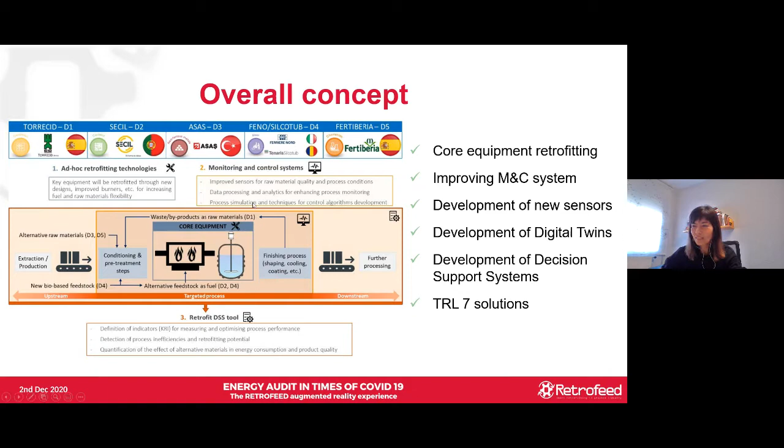Okay, I'm going to go through the technical actions to be implemented in each end user. In TORRECID, which is a producer of frits and glazes for the ceramic and glass sector, the core equipment corresponds to a frit furnace, where one of the main concerns is to reduce the raw material losses between load changes. To tackle this inefficiency, a smart combustion control will be developed, adjusting the combustion conditions to the frit heat requirements. In addition, the feeding system will be enhanced, and together with dedicated sensors will be integrated in the monitoring and control system in order to optimize the energy resources.

A redesign of the heat recovery system of the flue gases will be tested for 2 different purposes. One of them is improving the combustion air preheating process, and the second one is extending the use of the hot air to the frit drying. With these actions, it is expected to achieve energy and material savings and optimize the fuel and combustion air use. A reduction of the material waste and an improvement of the monitoring and control system is expected. Next, please.

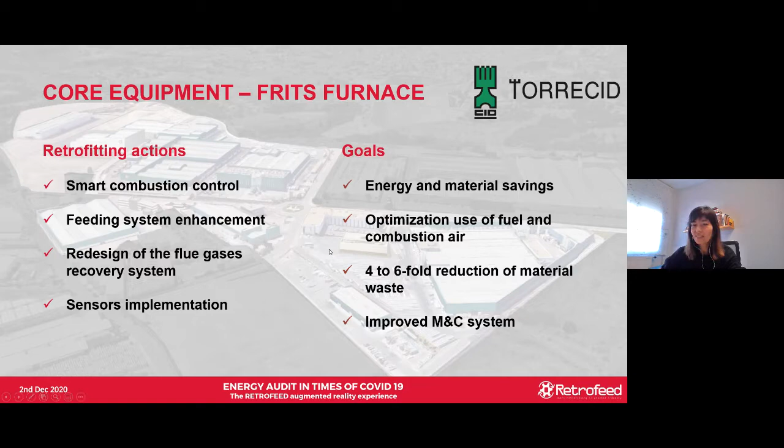In the case of SECIL, one of Portugal's leading cement producers, retrofit actions will be centered in the core equipment, the rotary kiln. A full-scale multi-fuel burner will be designed to be used with alternative fuels. New innovative sensors will be developed and installed to monitor the combustion process based on flame images and characteristics of the clinker composition by means of optical techniques.

In addition, alternative fuel will also be characterized to support kiln performance. Implementation of these actions will lead to a substitution of 60 to 80% of fossil fuel, contributing to a reduction of CO2 emissions. In addition, it's expected a 5% decrease in specific energy consumption, and so an increment in energy efficiency. A flue gases analyzer will improve the monitor and control system.

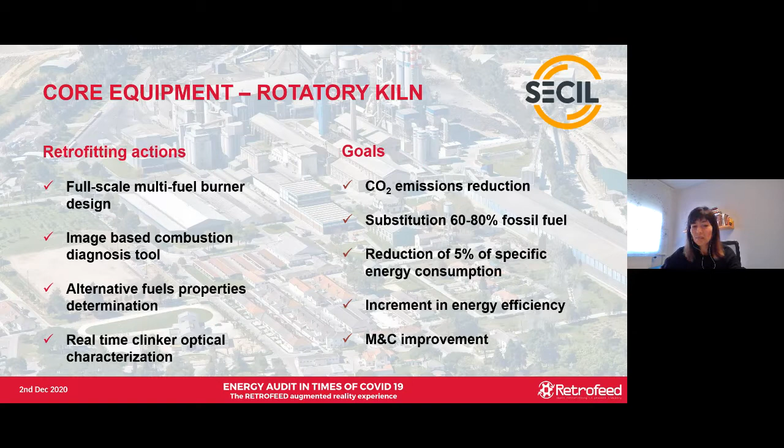In the case of ASAŞ, one of the leaders of aluminium manufacture in Europe, the goal is to increase the amount of scrap in the melting process while maintaining product standards. This way, a reduction of primary aluminium billet use can be achieved. For this, a delacquering system will be installed to remove the coating layer such as paint and oil, allowing an increase in the share of low-quality scrap in the feeder line. In addition, an oxygen injection system and burner head will be designed and installed to improve combustion performance inside the furnace.

Oxygen and total organic carbon analyzers will also be installed to support process management and ensure adequate emission levels, leading to an improved monitor and control system. The expected goals are related to an increment of the share of scrap up to 50%, reducing energy consumption. In addition, this action will generate more efficient combustion and a reduction of greenhouse gas emissions.

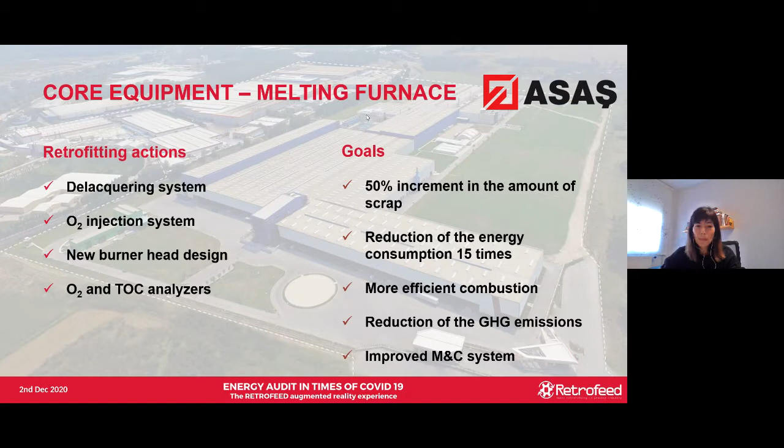In the steel sector, we have two end users, FERRIERE and SILCOTUB. In both cases, activities are centered in the electrical arc furnace, where circular economy concepts will be applied.

In the case of FERRIERE, biochar and plastic grains will substitute the use of fossil fuel for combustion. At the same time, anthracite will be replaced by biochar as carbon source, requiring modification of the injection system and burner. In SILCOTUB, rubber and plastic injection will be used as energy provider in the melting process. In both cases, a reduction of greenhouse gases is expected, and implementation of circular economy concepts will support the reduction of feedstock.

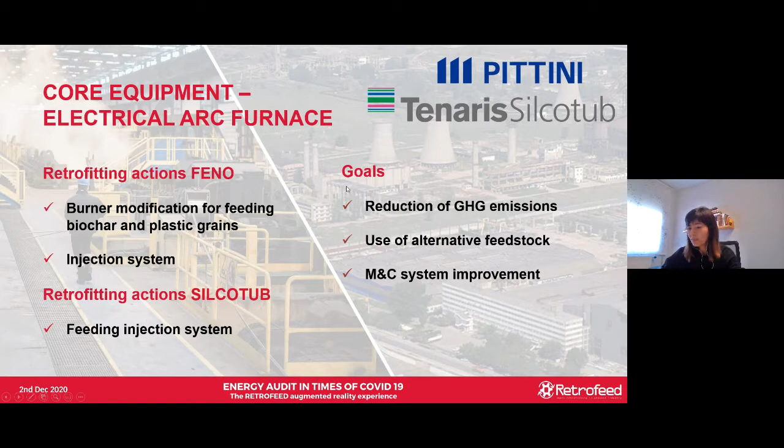FERTIBERIA, a Spanish fertilizer producer and one of the leading international providers of ammonia and its derivatives, will center retrofitting activities in the phosphoric reactor. The idea is to replace imported phosphoric acid by designing a new reactor to incorporate bio-based waste. This modification will lead to a substitution of 10% of the currently used phosphoric source, integrating raw material from waste and reducing cost. New sensors to monitor and control the new system will improve the monitor and control system.

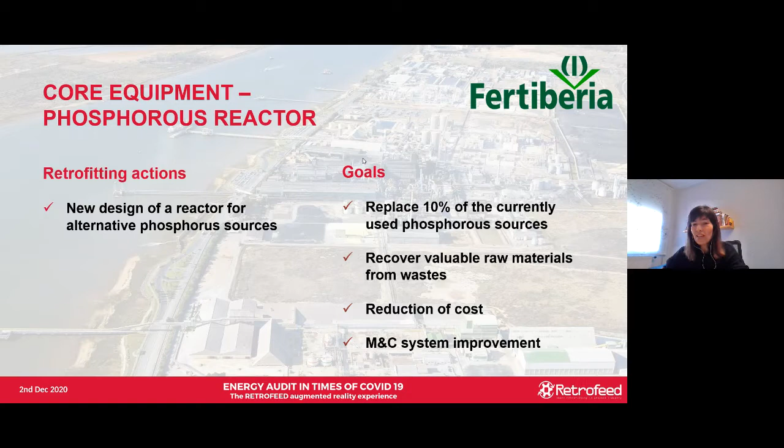With all these actions, we expect to obtain an increase of resource and energy efficiency by 20%, a reduction of greenhouse gas generation by 30%, a reduction of fossil fuel consumption by 20%, operational saving costs by 30%, and a productivity increase of 20%.

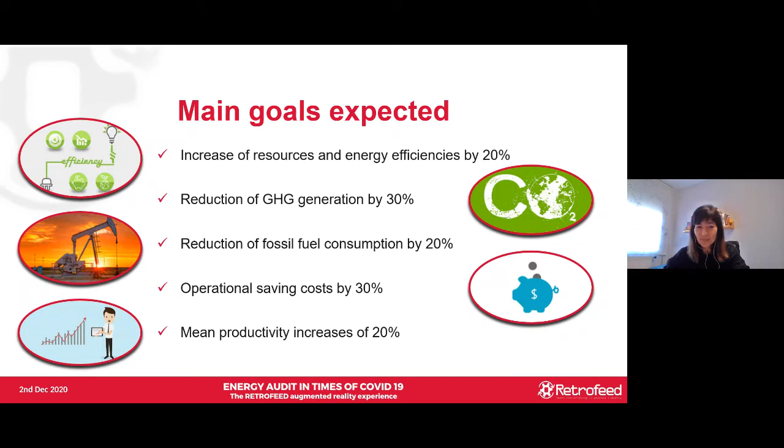As part of one of the first tasks in the project, we found complementarities between the end users and possible synergies that we think are important to highlight. For example, in terms of complementarities, the different sensors developed in CIRCE can be widely applied in other sectors.

In the case of the cement sector, the heat calorific value sensor can potentially be employed in FERRIERE and SILCOTUB to easily accommodate process conditions to the feedstock, whereas the sensor to determine clinker structure could be adapted to the case of the frit produced in TORRECID. The combustion diagnosis tool could also be applied in TORRECID and ASAŞ to determine combustion performance.

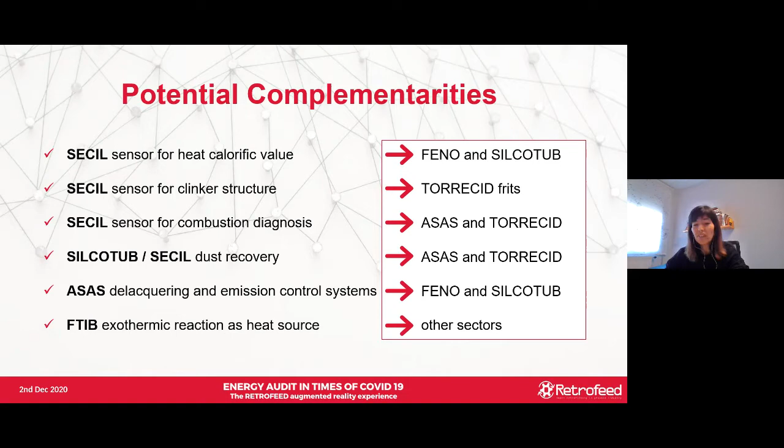The dust recovery opportunity arising in SILCOTUB and SECIL could be valorized for the case of ASAŞ and TORRECID, where metal dust is formed during the smelting process. Delacquering resistance could be an option to apply in FERRIERE and SILCOTUB, although further evaluation is required. Finally, the exothermic reaction expected in fertilizer production can be evaluated as an energy source in other sectors.

The potential synergies that we have already found are as follows: the use of TORRECID wastewater as industrial grade lime, and recovering electrical arc furnace dust which contains zinc, iron, and manganese to be used as plant fertilizer.

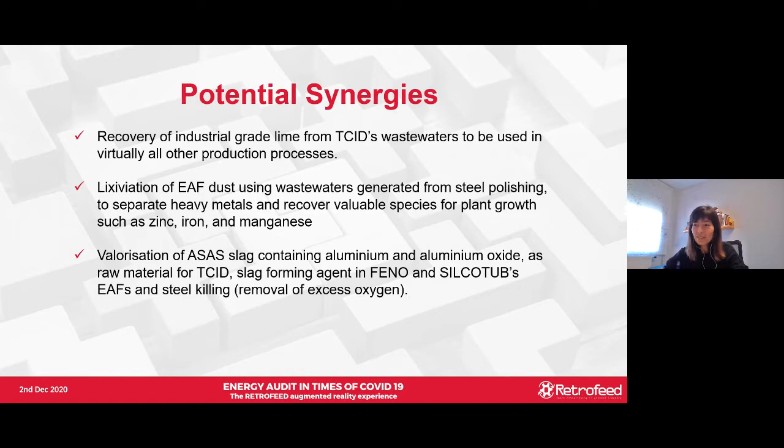The ASAŞ slag contains aluminium and aluminium oxide, which can be used in TORRECID, FERRIERE Nord, and SILCOTUB. The oxide from ASAŞ can also be used in FERTIBERIA for fertilizer production.

The content of different valuable metal materials in waste frit produced by TORRECID can be considered as raw material in the steel sector. Finally, the high content of metal oxide and aluminum produced in the steel sector can serve as feedstock in the ceramic frit process.

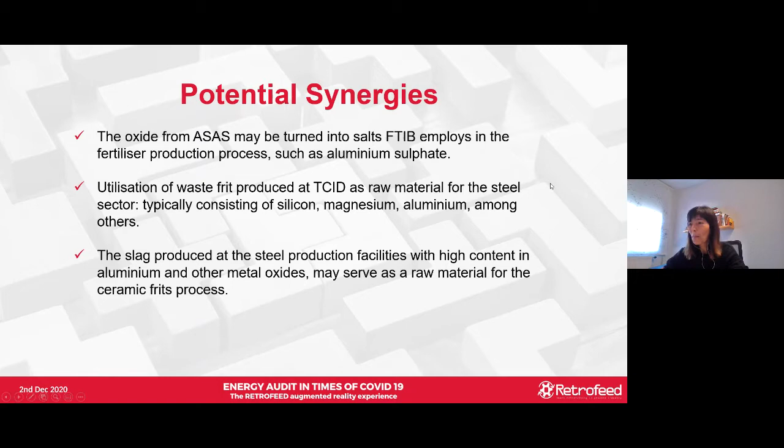So finally, the final remark in this project is that it will make industry more flexible to new producer scenarios. The digital and mechanical revamping actions we will carry out in 5 resource and energy intensive industries focus on core equipment. A decision support system will integrate different models to support the decision-making process.

Synergies and complementarities have been identified to facilitate the transition of European industries to more sustainable and responsible production practices, incorporating bio-based and circular economy concepts.

And that's it for my side.

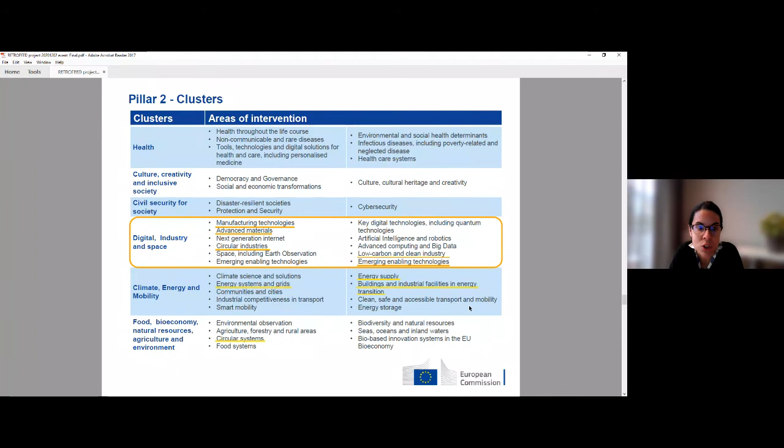There are other areas of intervention interesting also for some of the stakeholders here, in Cluster 5, for example energy systems and grids, energy supply, buildings and industrial facilities in energy transition, or also in Cluster 6 with circular systems.

From H2020, there were some lessons learned that helped to build and strengthen Horizon Europe. The key novelties are the European Innovation Council, R&I missions, extended association possibilities, open science policy, new approach to partnerships, and spreading excellence. I will describe some of them in more detail.

The European Innovation Council will help support innovations with breakthrough and disruptive nature and scale-up potential that are too risky for private investors. This is very important, and it has been identified to bring technology solutions to market. So there will be a Pathfinder for grants from early technology to pre-commercial, and an Accelerator that also includes a blended finance mechanism to bring solutions to market and ensure scale-up.

Another novelty are the R&I missions. R&I missions will be bold and inspirational, with a measurable goal to ensure impact for society and policy making. So far, 5 mission areas have been listed: adaptation to climate change, cancer, soil health and food, climate neutral and smart cities, and healthy oceans, seas, coastal and inland waters.

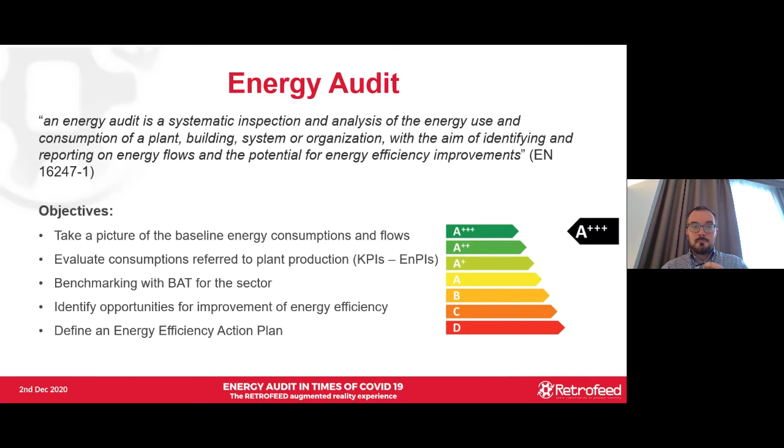In the next slide, we have the energy audit process, as schematized in the European norm. Other European norms provide specific provisions on buildings, industries, and transport, and in addition, every European member state has prepared its own guidelines for the execution of energy audits in line with the prescriptions of the Energy Efficiency Directive. The overview of this chart: the startup meeting, preliminary activities, data collection about the plant and its production and energy consumption, analysis of the data, development of energy balances, evaluation of theoretical and actual energy performance indicators, comparison.

If they are not comparable, since there is margin for improvement in terms of energy efficiency, we identify the energy efficiency actions, carry out a cost-benefit analysis, we rank the proposed opportunities, and produce an energy audit report that summarizes all the analysis carried out, the baseline situation, the proposal for improvement, technical and economical feasibility, and definition of energy efficiency action plan.

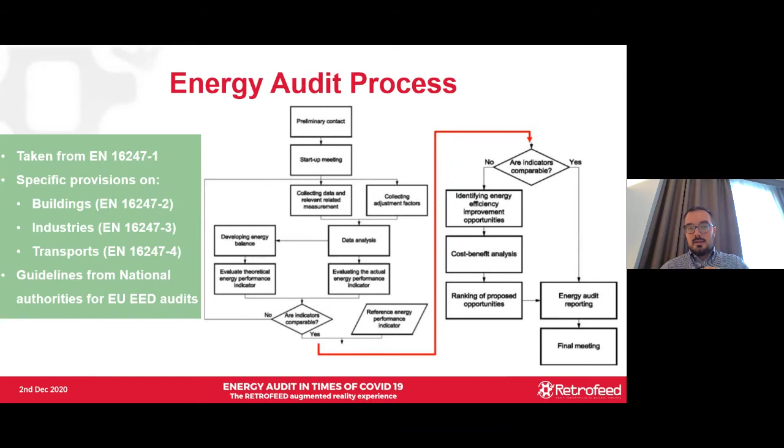So again, the main phases are, besides the preliminary contact and kickoff meeting, data collection, the site visit, that is the core of the analysis, reporting, and final meeting. So this is the core of the activity, and specifically the site visit is the core part. Let's say all the core phases of the energy audit could theoretically be carried out without going to the site. Data collection can be exchanged via email and file sharing, etc.

Energy monitoring tools can be shipped to the site and installed by plant technicians to measure the electricity consumption, other energy consumption, carry out checks with the thermal infrared camera, etc. The only exception was the visual inspection part of the site visit, because we couldn't do a site visit before without going physically to the site, but now with this smart augmented reality solution that we have identified, the Kiber helmet, we have found a solution to complete also the site visit without being physically at the industry.

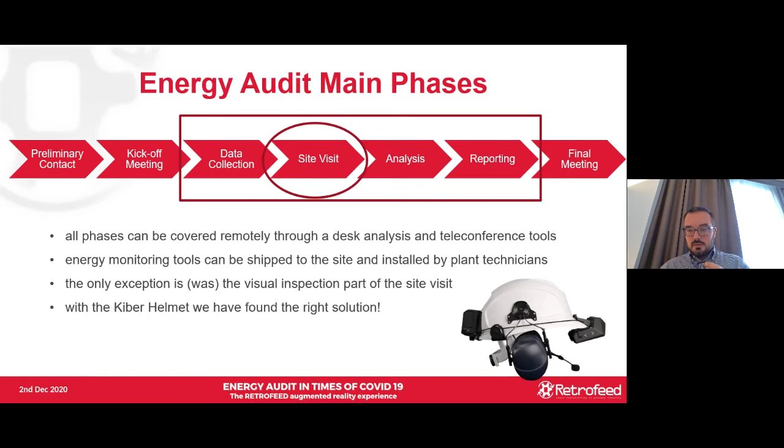Okay, I said that the first phase of an energy audit is data collection. Here, all pictures are very small, but it's just to make you see that we require a lot of data as input to the industry where we carry out an energy audit. And these data are mainly related to general data of the plant, total energy consumption by energy carrier, electricity, natural gas, other fuels, etc. Monitored consumption trends, if they are available thanks to an energy monitoring system, production values to calculate the key performance indicators, list of equipment installed at the plant with electric and thermal power, process flow diagram, site layout, etc.

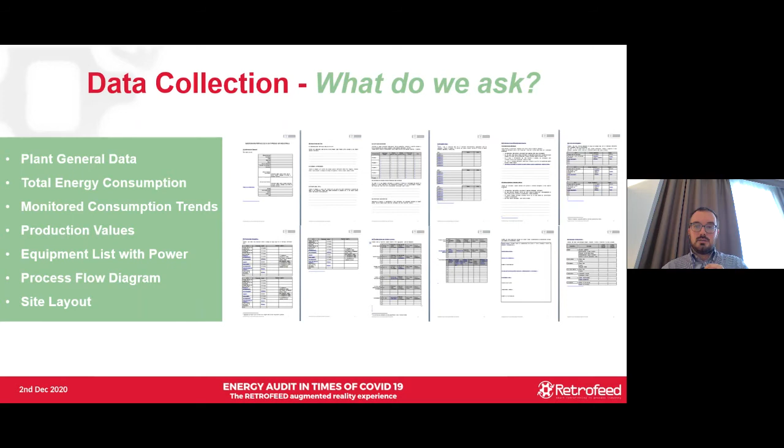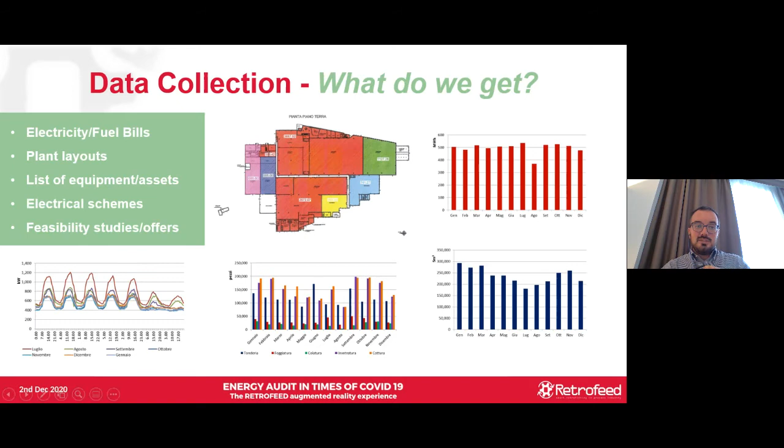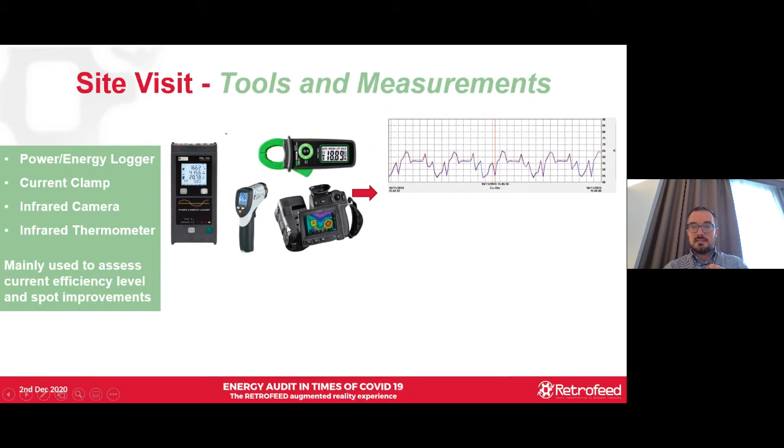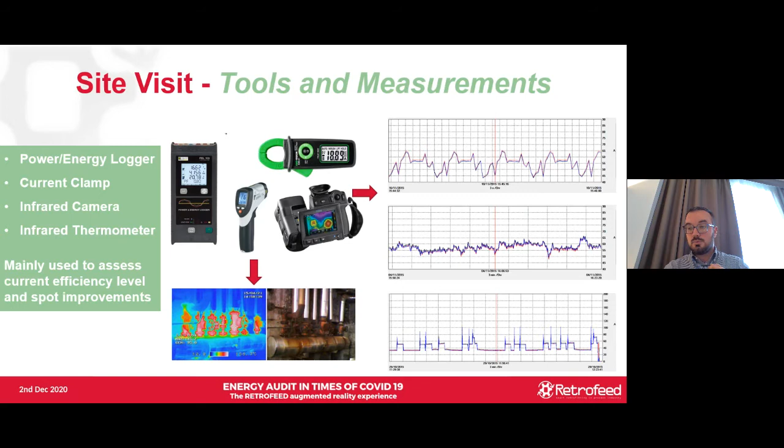We get all this kind of data, and we use this data to assess the current energy efficiency level and spot potential improvement. In addition, what we do during the site visit is a visual inspection of the plant. We discuss with the plant personnel while looking at the different departments, equipment, and areas of the plant. Of course, this could be done also remotely.

While visiting the plant, we try to understand better the real layout of plants and systems, to get the nominal data of installed devices, looking at the labels on the devices if this data were not available from the data collection phase, check the type of equipment, the presence of a control system, check if there is margin for improvement of management practices, and evaluate if there is area for the installation of new devices that we might recommend. All of these are carried out during the site visit together with the plant personnel, so everything is discussed with them in order to achieve the best possible understanding of the site.

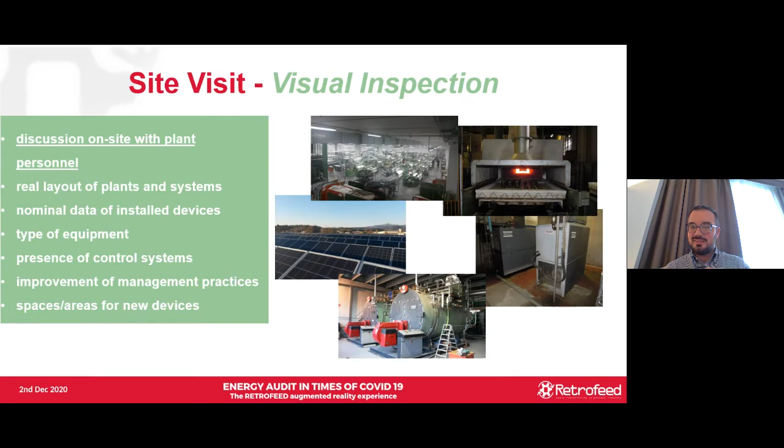What do we do with the Kiber helmet? We can do all that I listed in the previous slide. So we can walk through the plant of the industry with a representative of the company. We can have a visual inspection of the different areas, of the different equipment, understand the function of the different machines, the presence of control systems, how energy is typically managed in the plant, exactly as if we were there. I will show now an example, just this 1-minute video taken during the virtual site visit to the TORRECID demo.

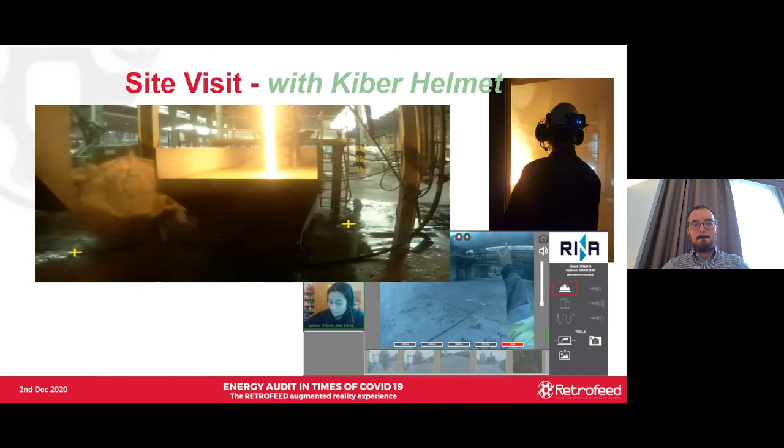Okay, as you can see, we have a very high quality of the image, and we can see everything that we want during the site visit, and also take these spot measurements with the integrated camera in the Kiber helmet.

Regarding the Kiber helmet, what are the main functions and benefits? I will leave the floor after my presentation to my colleague Enrico Di Martino. Now I'm finishing my presentation on energy audit.

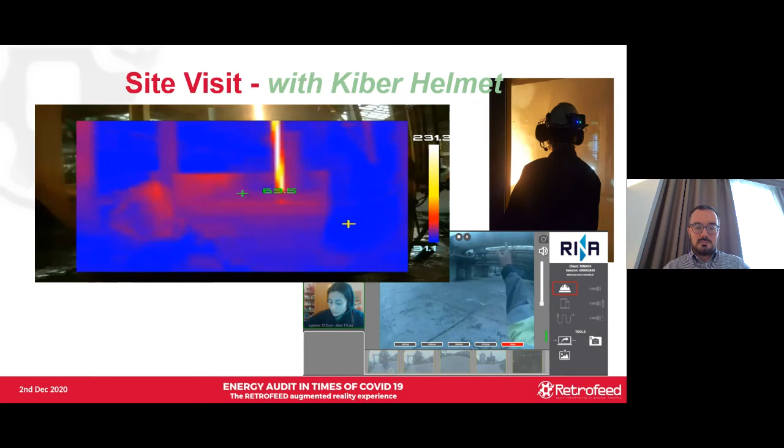So we have collected all the data we need. We have carried out the site visit, either physically in person or through the Kiber helmet. Then we arrive to the follow-up. So we determine the energy balances and indicators for energy consumption in the plant. We analyze the total consumption of the plant, the main activities that are production activities, auxiliary or ancillary services, general

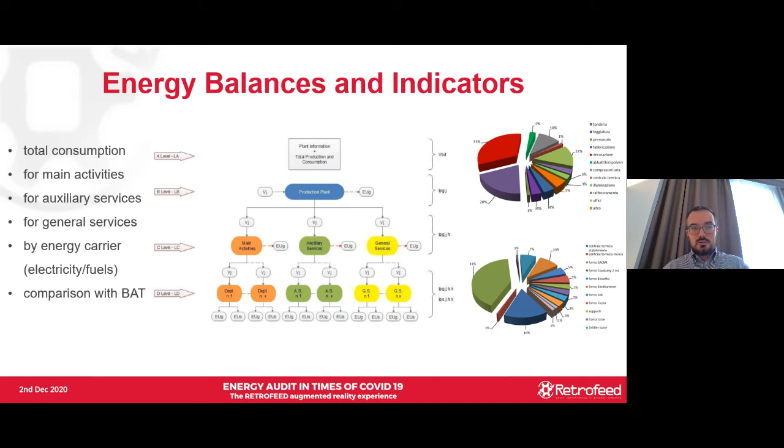services. We determine the breakdown of electricity and natural gas consumption among the different departments and users, and thanks to the determination of these energy balances and the production data that we have collected, we calculate energy performance indicators for each area, and we compare for each area this energy performance indicator with the relevant benchmarks in order to identify where the largest margin for improvement exists.

And for the areas where potential improvement exists, we carry out a feasibility study for energy efficiency measures. So we identify potential improvement. We carry out a technical feasibility study, carrying out a preliminary sizing of the devices needed, evaluation of the potential energy savings, potential avoided greenhouse gas emissions, but also we evaluate the investment cost for the realization of the measure and the economic savings, thus carrying out a preliminary financial viability check.

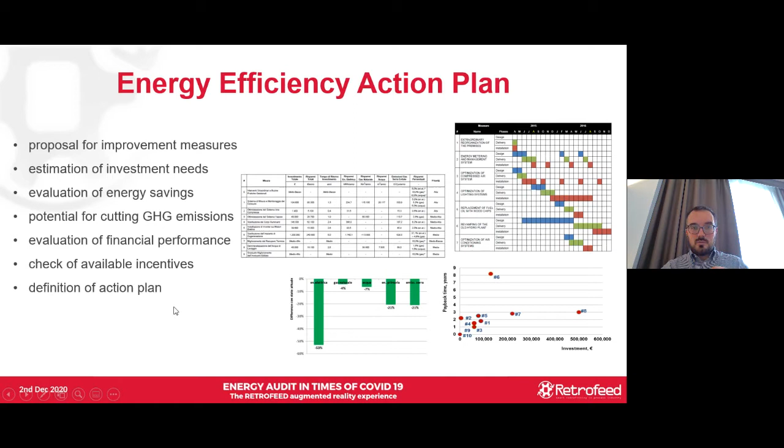I think that's all from my side. Of course, I am available for any questions you may have, and I leave the floor to Enrico Di Martino, my colleague, for the presentation about the Kiber helmet. Thank you.

Okay, thank you, Giorgio, for your presentation. So now it's time for Enrico. Yes, you can share your screen. Yes. Okay. Yeah, now it works perfectly. So the floor is yours, Enrico.

Okay, thank you. My name is Enrico Di Martino. I work in RINA Consulting, and I'm the leader for the digital project team within the energy business unit. And one of our digital services is to provide the Kiber helmet technology to our clients and partners. The Kiber helmet is a solution which is provided by a company called VR Media.

VR Media is a company born within the University of Sant'Anna in 2002, and from that year they have developed this product that reached commercial availability in 2014-2016. So it's just in the last 3-4 years that we have had this technology on the market.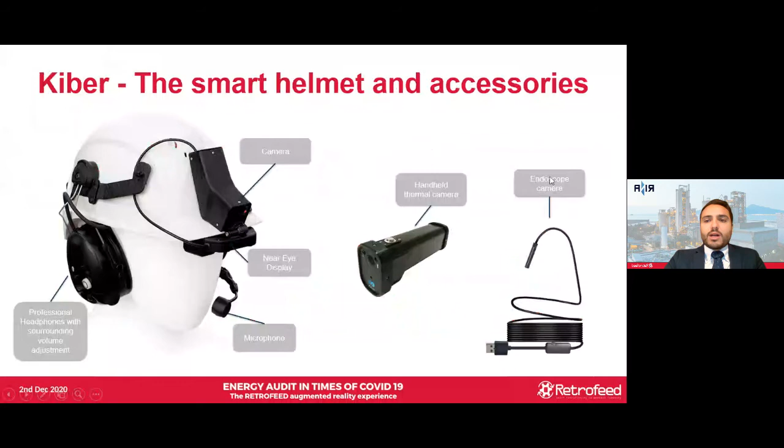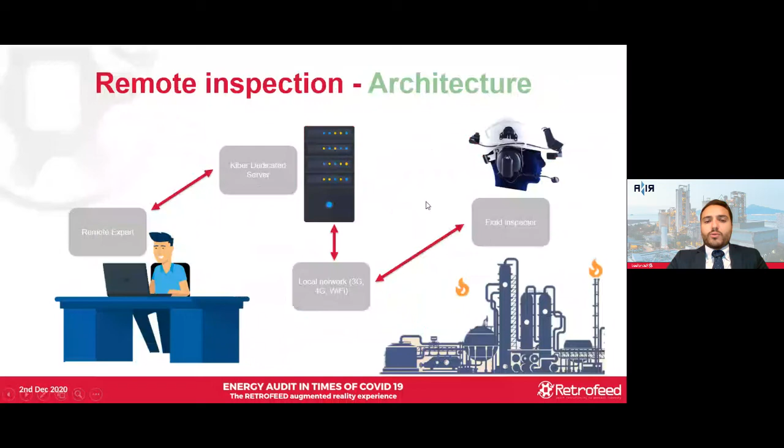So this system works thanks to a specific architecture that links the remote expert with the field inspector. So we have a dedicated server provided by Kiber that connects, through a local network or a 3G or 4G connection, the field inspector with the remote expert.

The remote expert and the field operator can share different contents in different directions. So it's possible to share audio and video, of course, up to 1 megabyte per second quality in both directions. So the field operator can see the remote expert and the remote expert can see the field operator.

The maximum number of remote experts at the moment is 14. So we have 3 main remote experts plus 11 people that can attend the remote inspection but cannot interact with the field operator. The remote expert can also share documents with the field operator, who will be able to see the documents using the near-eye display.

It's also possible to use an augmented reality feature that enables the remote expert to point at something on the screen, so the field operator can focus the view on what has been pointed at, or it is possible to take a screenshot and write on the screenshot, and the field operator will see in real time what the remote experts are writing on the screenshot of the field of view that the field operator has.

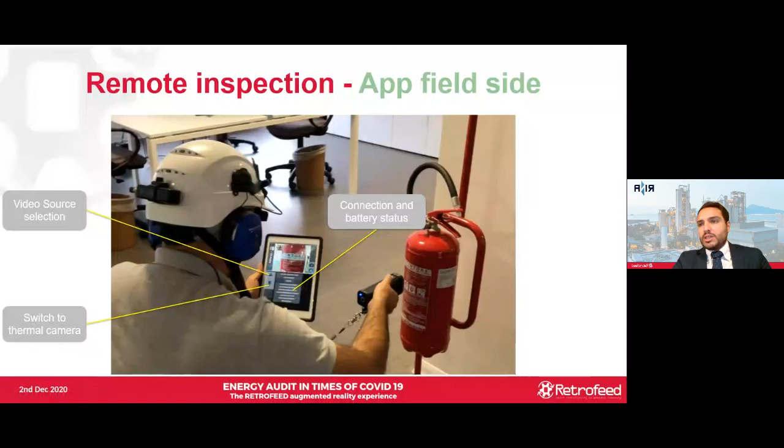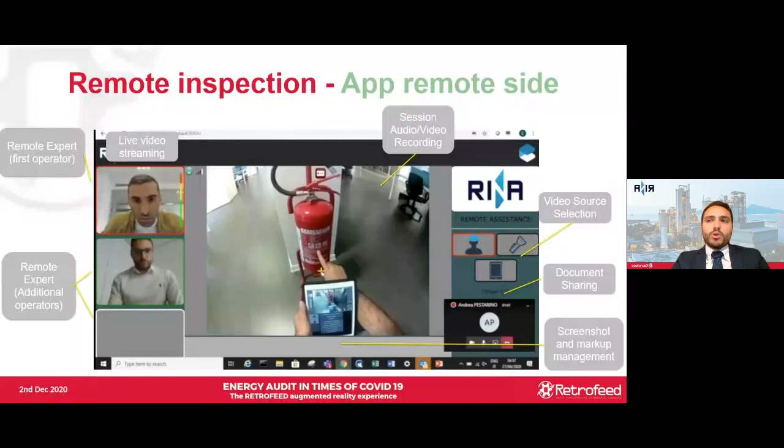From this session it's possible also to record the inspection session, and it's possible to take a screenshot, markup on it, and save the screenshot along with the markup that has been made.

We also have a light version of the Kiber technology, which works just using a smartphone. So it's possible to perform remote site activity using the smartphone. Of course, here we have a limit on the features that the technology can provide. So we don't have the augmented reality feature. We cannot see the document shared within the near-eye display, because here the field inspector just uses their smartphone.

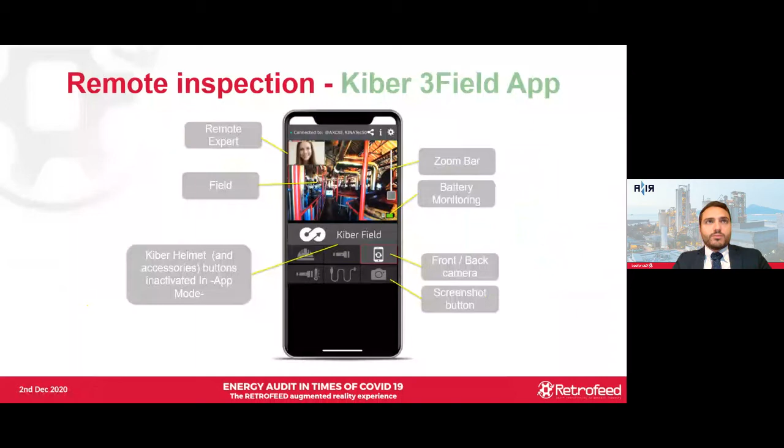And we also have the limit that in some plants smartphones are not allowed for safety reasons, while the helmet can enter because we have an ATEX version for the helmet. It was not the case of the RETROFEED project, but sometimes we need to use an ATEX technology for a specific plant.

Now, everything works thanks to the internet connection. So internet connection is a must to perform this kind of activity. 85% of the time we are able to provide an internet connection using a smartphone hotspot, because the Kiber technology has been set up to be utilized also with low bandwidth availability. So with the normal 3G or 4G connection, it works very well.

But if we need to cover a wider area, or we need to have a very stable connection, we can use different solutions that are available on the market. So for instance, we can use a mobile router. So we can exploit the 4G connection, but we can extend the range of the local Wi-Fi that we are creating. Or we can cover wider areas building a mesh Wi-Fi network that can be built temporarily for temporary applications, or also as a permanent connection.

So if we need to inspect a plant quite often, we can decide to install a mesh Wi-Fi network as a permanent installation. For very remote places such as oil rigs, ships, etc., it is also possible to use the satellite connection. Of course, this solution has some limits, and in the last weeks we are working to perform tests and to find the right tuning of the technology in order to work well also with satellite connection.

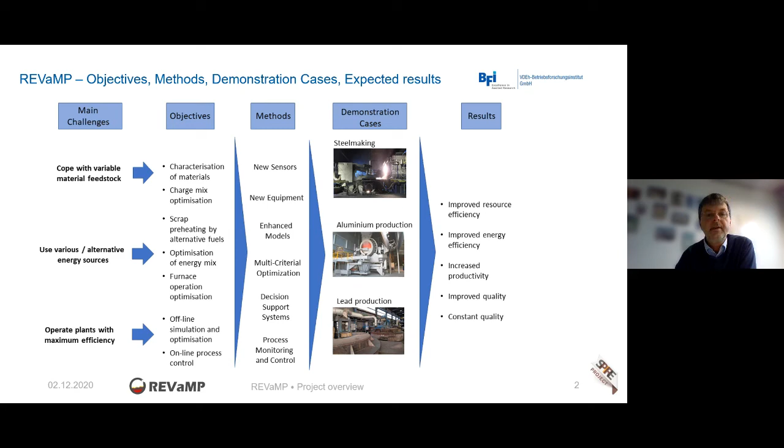So to come into some more detail regarding our project objectives. So we want to develop, adapt, and apply novel retrofitting technologies to cope with the increasing feedstock variability, and also to ensure an efficient use of this feedstock in terms of materials and energy.

And this shall be done by development and application of novel sensors for characterization of metal scrap regarding its chemical composition. Then we will develop a metal scrap preheating system, which will be operated with waste-derived fuel. That means we will use plastic waste, mainly coming from the automotive industry, so-called shredder plastics, which shall be used as fuel for this preheating system.

Then we will develop and apply several software tools to model the operational input conditions of the processes and then use these models for monitoring and control to optimize the processes for the metal production at varying feedstocks.

So we have demonstration cases with 3 different use cases from the metal making industry. So for steel making, we have 2 industrial partners. One is using an electric steelmaking plant, and the other one the classical steelmaking process route with a blast furnace and an oxygen steelmaking furnace. Then we have two plants which are performing aluminum refining, also from aluminum scrap, and then one plant which is performing lead recycling, mainly from used batteries.

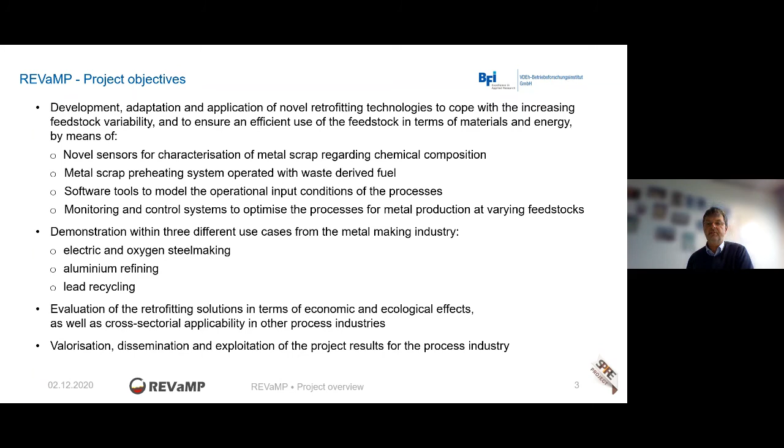So to come into some more detail regarding the different methods and technical approaches which we will follow in the project. So we will first of all analyze the material and energy feedstock for the different metal making processes. Then we have a large part dealing with the scrap preheating equipment for preheating of aluminum scrap. And also a main focus of the project will be to develop several sensors for feedstock characterization.

So there will be some, let's say, more general sensors like gas temperature and composition sensors, especially for the scrap preheating equipment. But most of the sensors will be used for characterizing the metal scrap in terms of its composition. So here we will follow the development of a so-called neutron sensor, which in the end uses gamma rays to analyze the composition of the metal scrap.

This will be a sensor which is able to analyze the bulk of the scrap material, because all sensors which are available so far can only analyze the surface, but cannot look through the surface, for example, of a scrap pile or of a scrap load in a truck which comes into the plant. So with this neutron sensor, we want to analyze the bulk composition of the scrap material. And in addition, we will use a more or less conventional LIBS system, laser-induced breakdown spectroscopy, which will be able to analyze the surface composition of the steel scrap.

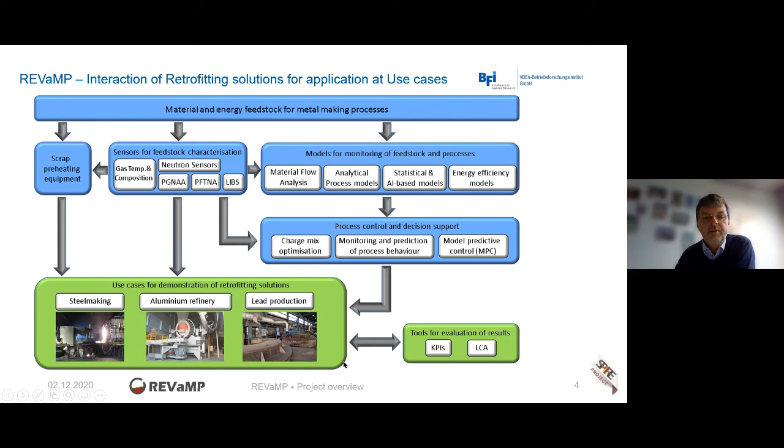Project consortium and its distribution to the different methodologies. So the REVAMP consortium consists of 16 partners from 3 different European countries, Germany, Spain, and Poland. So we have 7 research institutes which are working in the field of sensor development and development of process models and tools for process monitoring, control, and optimization. Then we have 4 companies for providing the sensor technology and the plant equipment. 3 of them are SMEs. I will come back to the different companies in the next slide.

And then we have 5 world-leading industrial companies from the metal production sector, 2 steel plants, one in Germany, one in Spain, and 2 aluminum production plants, both in Spain, and then we have a lead production plant also in Spain. And at these industrial companies, the different retrofitting solutions will be implemented and demonstrated in their application for improvement of resource and energy efficiency in an industrial environment.

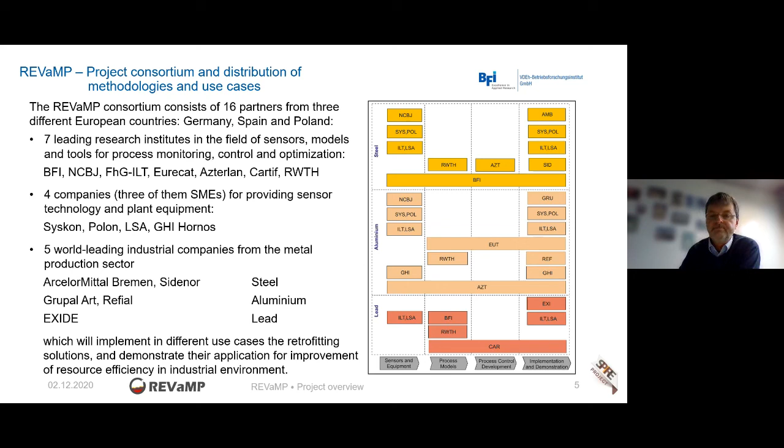production factories. One is Refial, which is working together with a plant supplier for the preheating equipment, and also with the research institute Azterlan in the north of Spain, the Basque Country.

Then we have a second group in Spain with Exide for lead recycling and lead production, working together with Cartif, a research institute. And the third party in Spain is the company Grupal Art, also for aluminum refining, and Eurecat as the accompanying research institute.

And then we have also a steelmaking plant, Sidenor in Spain, also in the Basque Country. On the other side, we have one further steelmaking plant in Germany, which is belonging to a very large group of steelmakers, the ArcelorMittal group, which is the largest steel producer in the world. They will participate with their plant in Bremen, north of Germany.

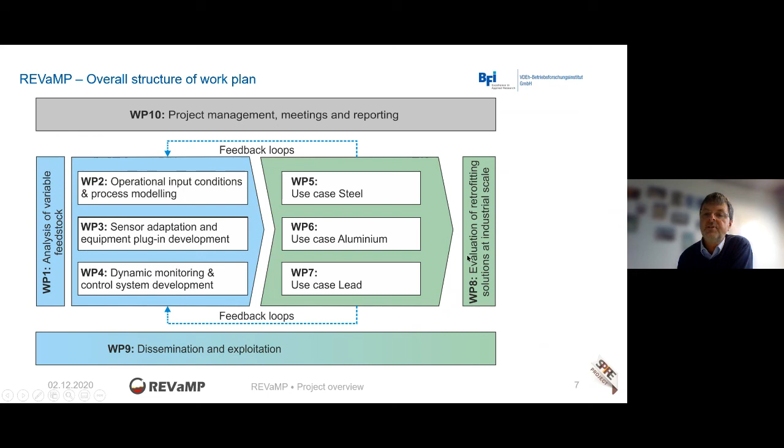Now, some words finally regarding our experience in the COVID-19 crisis times. So the kickoff meeting of our project, which started, by the way, on the 1st of January this year, 2020. So this kickoff meeting was the only face-to-face meeting which we could have so far in the project. So all further project management meetings had to be held as web-based meetings.

So we used Microsoft Teams for that. These meetings, however, worked quite well when considering the spread of partners in the project from west to east across Europe. So, of course, the main drawback for the scientific and technical project work was that almost no plant visits

were possible. So there were some plant visits inside one country, but especially for the research institutes and SMEs who develop the sensors for characterization of the metal scrap, they would of course need to visit the plants where their equipment, their sensors shall be implemented. And this was so far not possible to have a physical plant visit.

So the group in Poland will develop the neutron sensor. The group in Germany will develop the LIBS sensor. And both sensors shall be installed at the industrial sites of the metal production plants, which is the steelmaking plant in Bremen, the aluminum refining plant in Spain, and also the lead production plant in Spain.

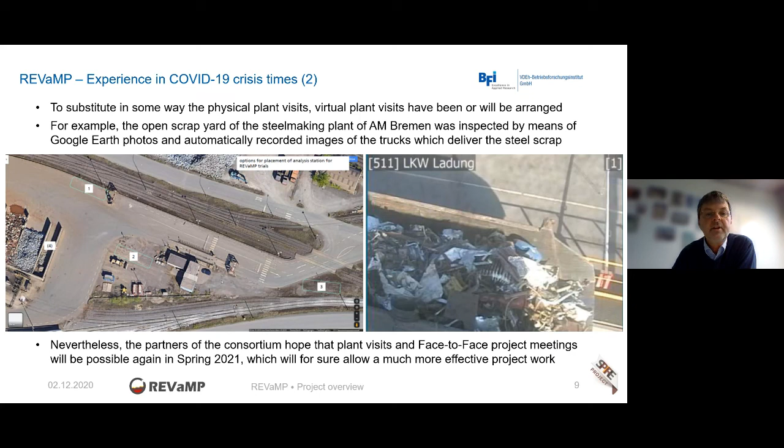Yes, this was already the last slide of my presentation. Thank you very much for your attention, and of course I can answer questions if there are any.